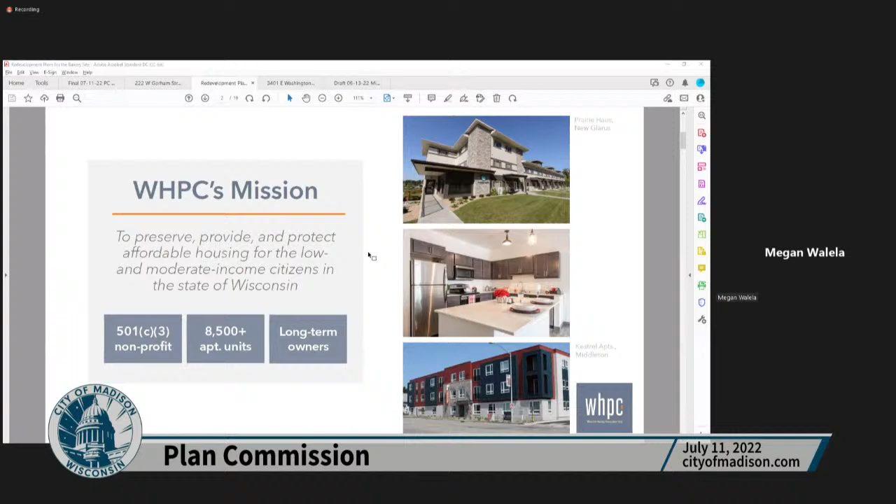Next slide, please. Here are photos of the site we plan to redevelop. You might remember the bread aromas that wafted from this site when it was an active bakery. But the 6.4 acre site has been sitting vacant for 3 years, even longer for the adjacent retail building along this major transportation corridor, which is unfortunate since this intersection will soon have a bus rapid transit stop, which I'll show a map of in a moment.

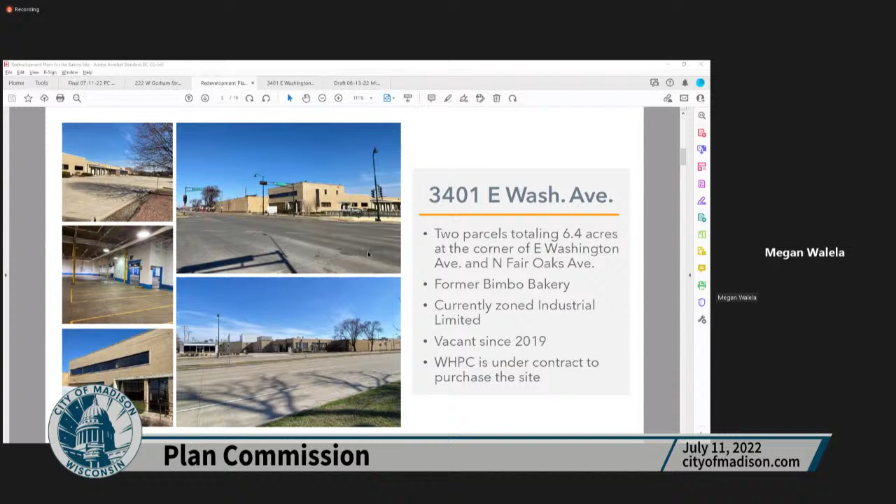Next slide, please. This project will bring 245 affordable apartments to Hawthorne neighborhood, 100 one-bedroom apartment homes, 102 two-bedrooms, and 43 three-bedrooms, including 12 townhomes. The site plan you're looking at shows the 4 buildings we're planning, which Kevin Burow of Knothe and Bruce Architects will show you more of in a moment.

This is a mixed-use development with approximately 4,400 square feet of commercial space along East Washington Avenue. And we're pleased to be able to offer 1.5 acres of park space, fitness and community rooms for residents, and soundproofing given its proximity to the airport, as Tim mentioned, and traffic along East Washington.

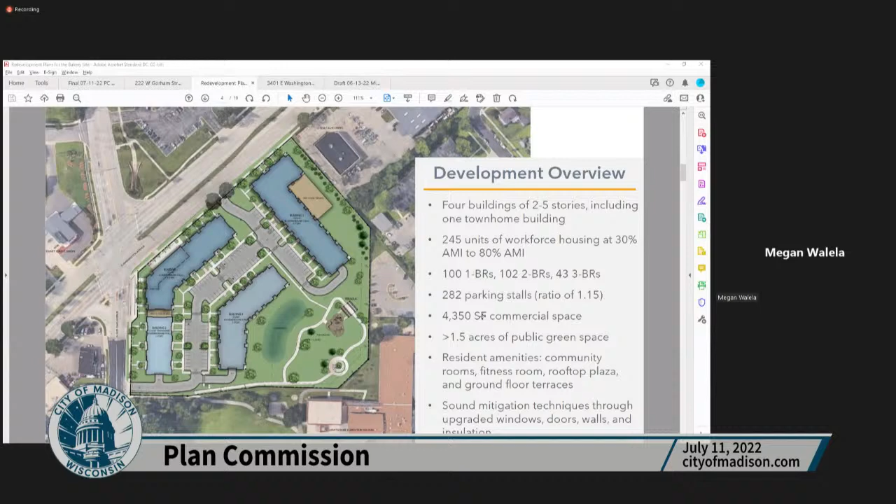Next slide, please. The site is close to many amenities such as Access Community Health Center, East Madison Community Center, and Madison College north of the site, and Hy-Vee Grocery less than a mile to the east of the site.

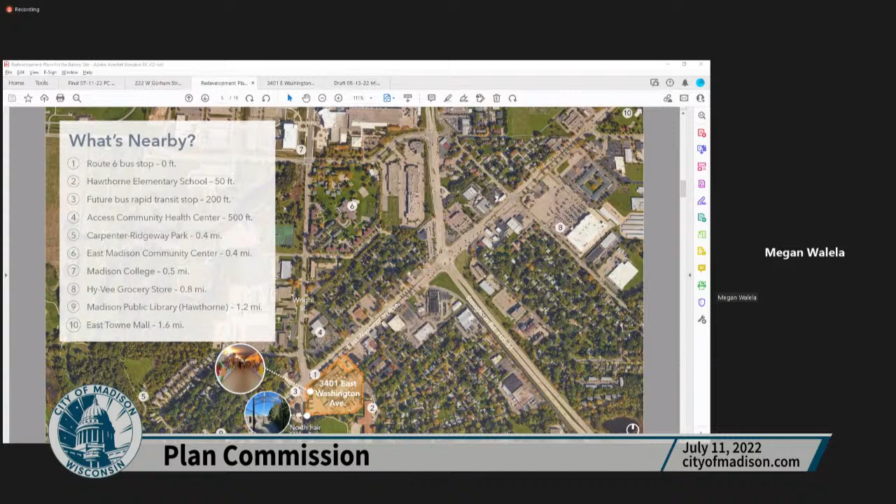Next slide, please. The location of this site along the Bus Rapid Transit's Red Line will help promote the city's sustainability goals and be a great feature for residents without cars or who want to reduce their carbon dependency.

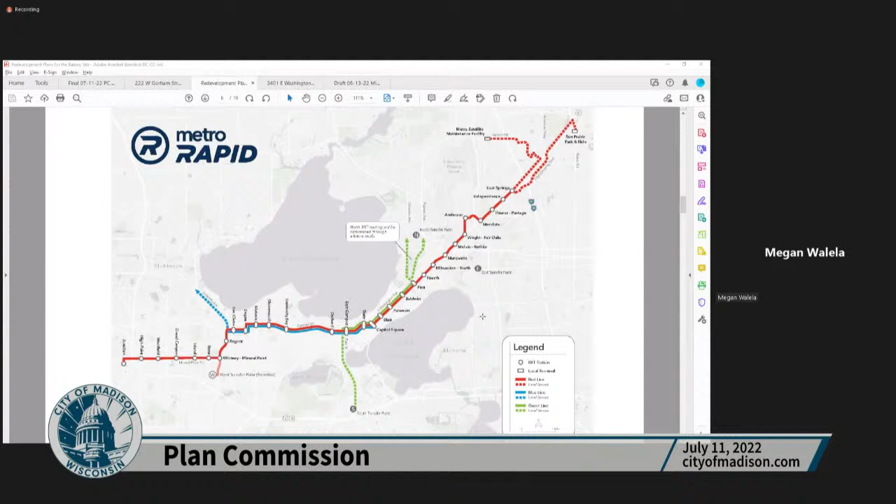Next slide, please. That orange dash shape is the outline of the site. So you can see residents of this development would be able to cross the street to board the Bus Rapid Transit at the Wright Fair Oaks stop. Next slide, please.

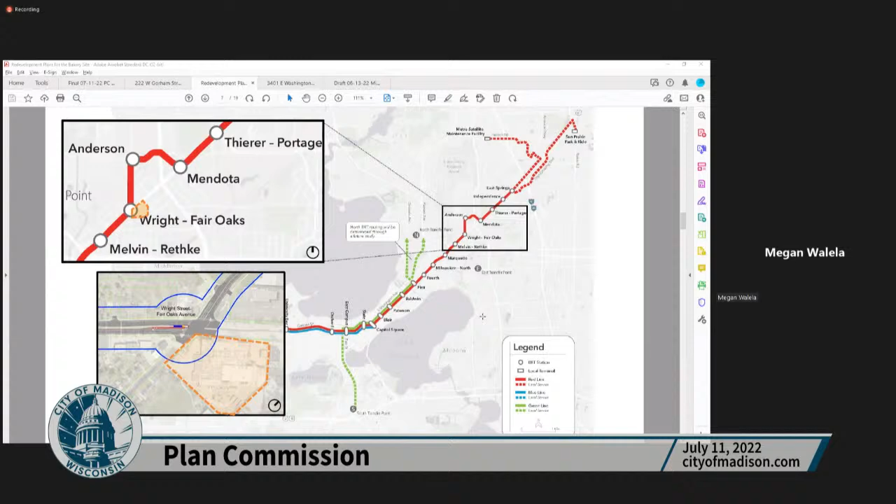As I wrap it up, I wanted to give you a brief summary of our outreach efforts today. I'd like to thank Alder Abbas for his continued engagement and support of this project since it entered his district this year, as well as Heather, Colin, and city staff for their efforts. In addition to meetings with a lot of businesses and organizations in the area, we've held several neighborhood meetings, including what I understand was the first hybrid in-person and Zoom neighborhood meeting in Madison, as well as coffee meetups with neighbors. These efforts have helped us arrive at the site plan and design that I'll now turn over to Kevin Burow to walk through.

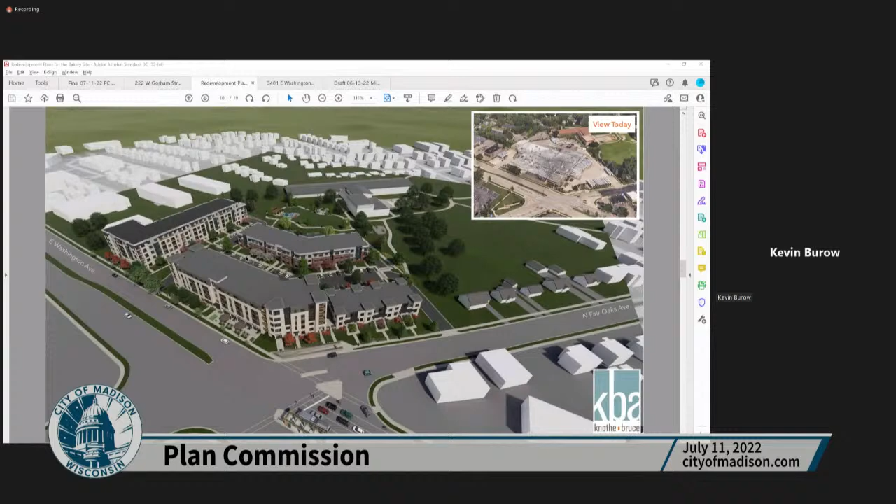If you go to the next slide, please. Here's a view looking from the corner of East Wash and Fair Oaks, where you can see how we're engaging the corner with a 5-story building, which would be the mixed-use building, which has commercial space right on the first floor, highlighted by the signage and the outdoor gathering areas. And then in the foreground, you can see the access to the underpass underneath East Washington Avenue for residents to be able to walk across and safely get to Madison College to the north.

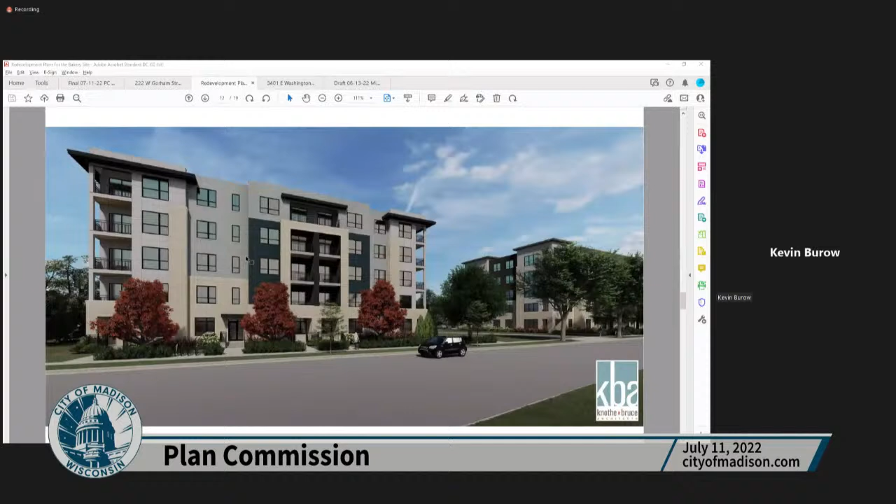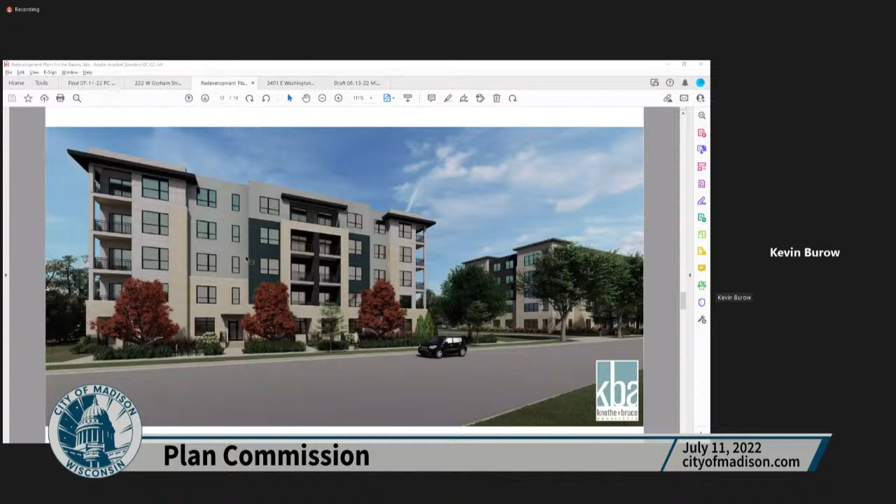If you go to the next slide, please. Here's a view then further down East Washington Avenue. You can see the second 5-story building, and this would be a residential building, which would have access to all the outdoor amenity space. If you go to the next slide, please.

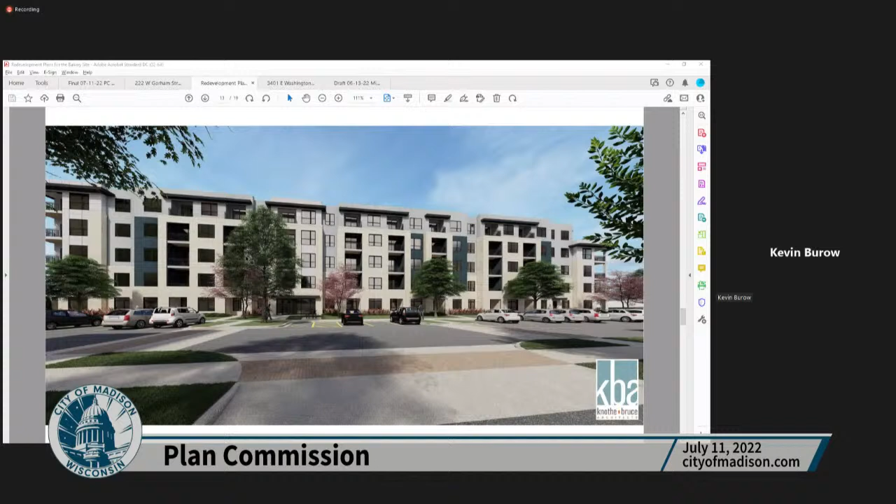Here's an interior courtyard view then of the project. You can see we have minimized the amount of parking on this property by utilizing just over 1.1 stalls per apartment and really enhancing and creating safe pedestrian crossings throughout the entire development.

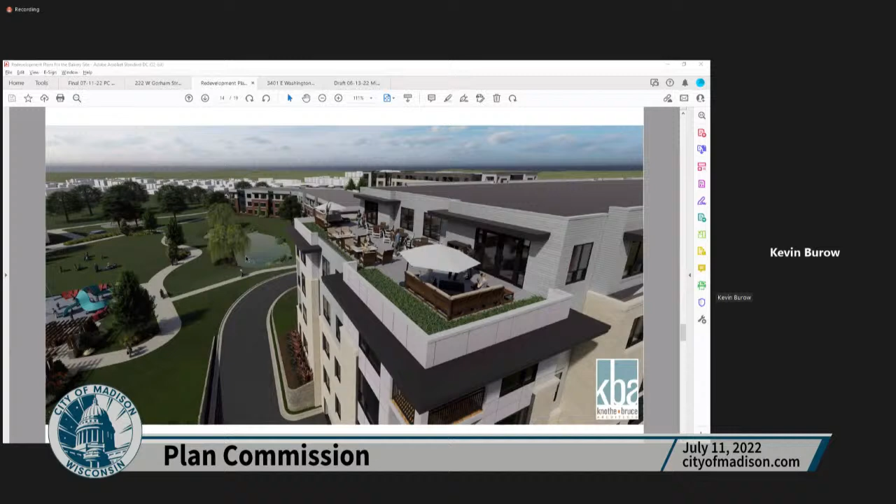Here's an interior view of that parkland area, where we'll have outdoor gathering spaces, playground areas, grilling stations, etc. So easy access for all residents, and it serves as a wonderful transition between this mixed-use development and Hawthorne Elementary School, which would be directly behind us.

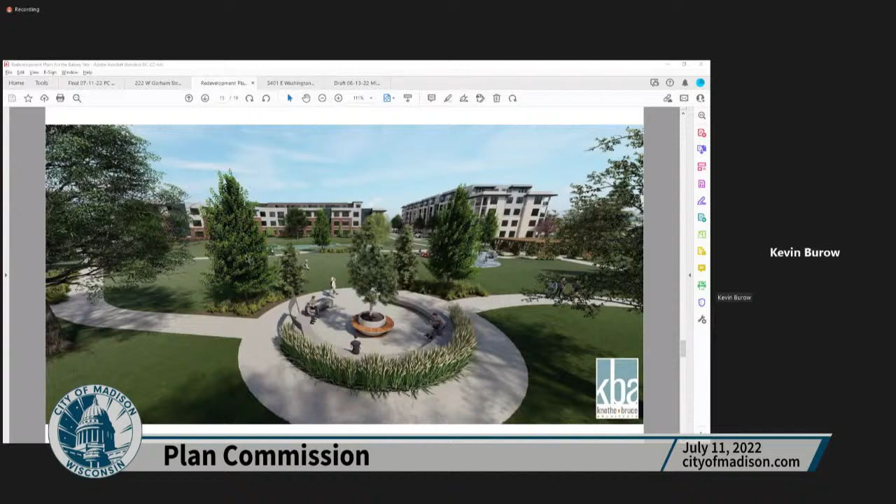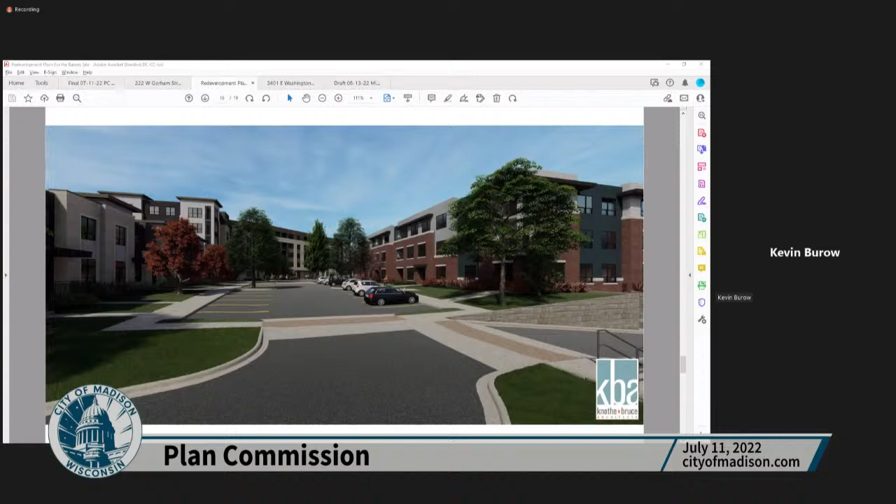Here's a view. We've created a strong pedestrian connection throughout the center of the property, connecting to that underpass along East Wash, which gives you easy access to the bus rapid transit station that will be occurring there.

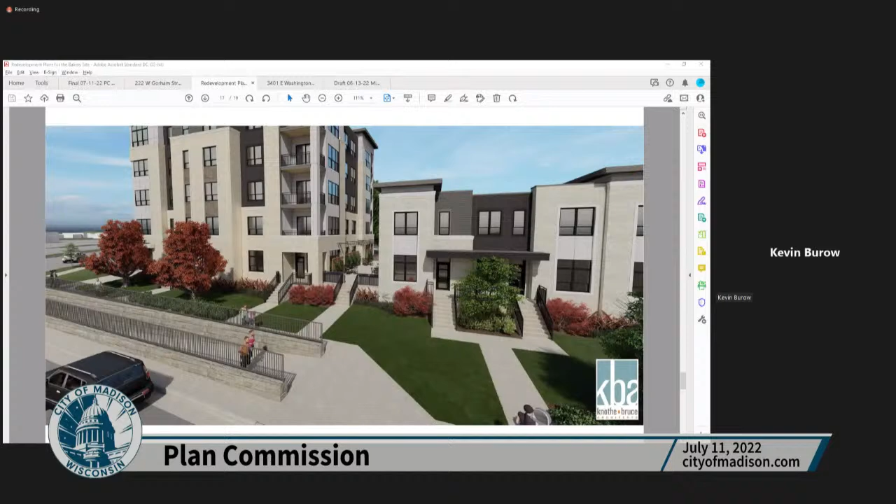And here's a view looking at that bus rapid transit station, which will be at the intersection of Fair Oaks and East Washington Avenue.

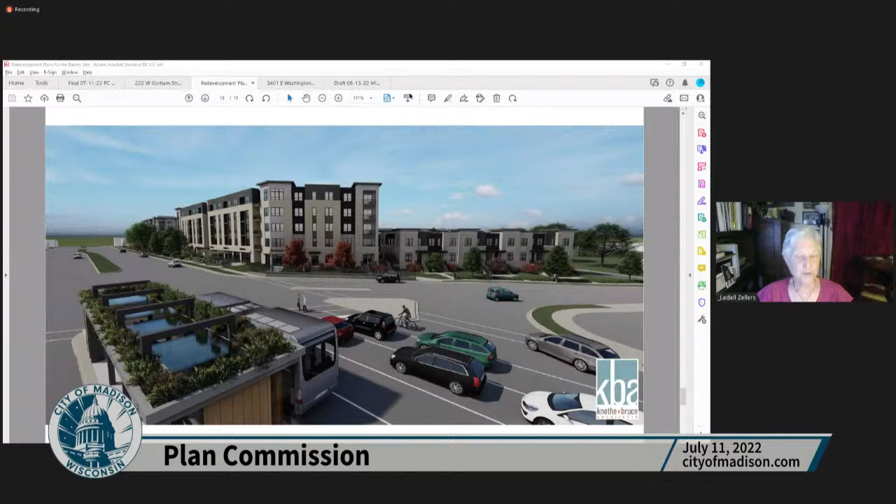I thank you for letting me speak. I live in the Eken Park neighborhood, I've been here about 30 years, mostly renting and lately become a homeowner. I was at a previous meeting the developers had for this, and I strongly support it. It seems very thoughtfully done. I like that they have green space, particularly between the buildings and the elementary school. I love that it's affordable housing, we definitely need more of that. Having it on East Washington is a great boon. The first speaker talked about a lot of the things that are close, like Madison College, great access to BRT, great access to all the bus lines, downtown entertainment, Hy-Vee, Aldi, which is a great grocery store for those of us who aren't very well off. Overall, I think it's going to be a really good project, and I think they've put a lot of work into it. I think it's going to be as good a boon for our neighborhood as Ella's Deli was, the redevelopment of that apartment building. So I would just like to ask for your support on this. I've been impressed with them so far.

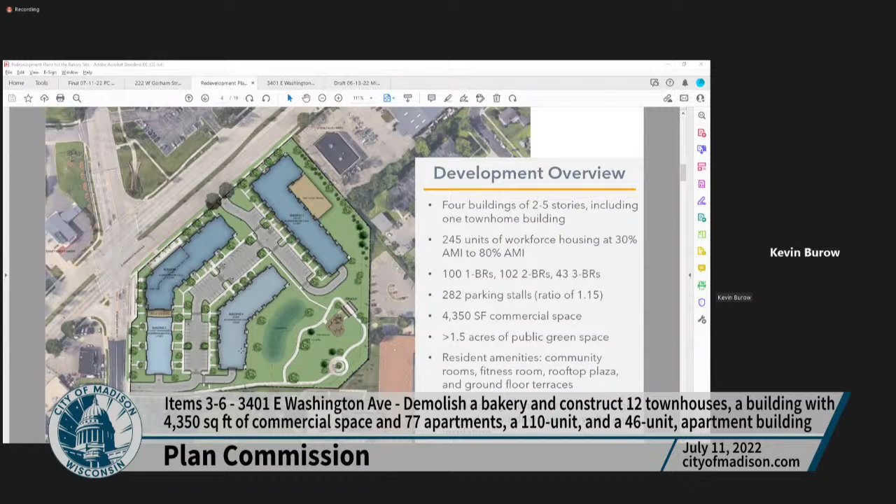Sure, I'd be happy to answer those questions. In regards to access to the site, we have 2 vehicular access points, but they are removed quite a bit from the intersection of East Wash and Fair Oaks. On the far southern end, there's a driveway running along the property of the school to the south, with residential immediately to our south and the school adjacent — that's the one vehicular entrance off of Fair Oaks. Towards the middle of our site along East Wash, we have the secondary vehicular entrance. So people can come either way: if heading northeast on East Wash, they can turn in, or if coming north off Fair Oaks. If coming from southwest on East Wash, they'd take the corner at the lights, head down Fair Oaks, then enter the property. So we're providing a safe distance from these driveway access points. All access to the buildings is contained within the interior of the property and along the sidewalk on East Wash for the commercial space and the main lobby entrance. All loading and unloading of residents and visitors takes place interior to the site, in a safe area, as there's no street parking available along East Wash or Fair Oaks.

With regards to any of the trash, that'll all be contained within the buildings in the basement levels. Each building will have their own interior trash room, accessed through the same entrance that residents who have access to the underground parking use. We locate the trash rooms immediately adjacent to those access points, so that there's central dumpsters available for residents to utilize, and then the trash companies would pick up safely from within the interior of the site.

As you can see on this plan, we have created numerous pedestrian crossings throughout the property and maintained the access pathway to Hawthorne Elementary School directly along the south end of our property, and then the interior sidewalk connections throughout the green parkland space that we are creating.

Just a quick follow. So in terms of loading and unloading, are there dedicated spaces for that, or is that just sort of, once again, you use what's available?

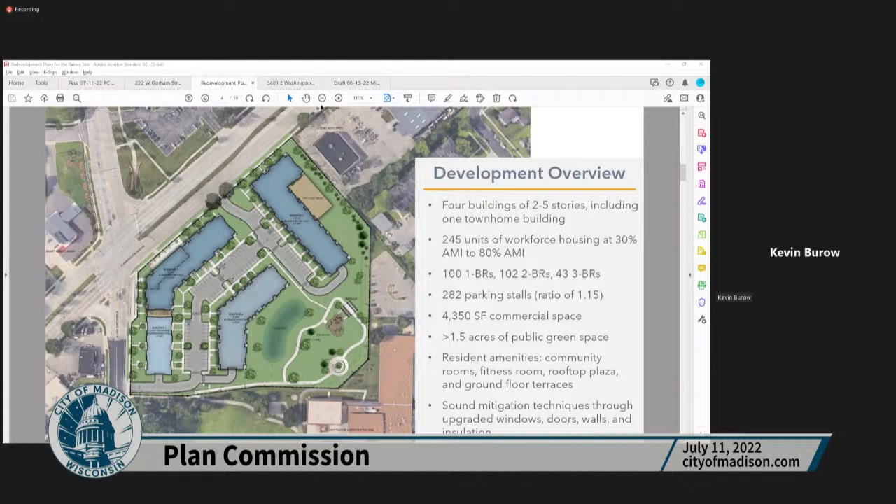Alder Paulson: Yeah, I have one more question. The zoning plan for that area says a maximum of 5 stories, and I see that you've gone to the maximum of 5 stories.

But because this is right on the bus rapid transit route, and we're interested as a city in looking at opportunities to put a little more density at these important intersections, I'm not saying that you should throw your plan away and start over, but I'm curious, if the plan had permitted you to go higher, would you have gone higher here? And I know that we're also in the flight path of the airport, and I'm not exactly sure where that height limit comes into play. But if you could have gone higher, would you have gone higher?

Kevin: I can speak to the construction techniques that will be used for this project to answer that, but Megan might want to chime in after I finish. The most efficient and cost-effective way for these buildings to be built in this market is a wood frame structure. Within a 5-story structure, we're able to achieve that by providing a concrete lid over the first floor and then 4 floors of wood framing above that. So this is the most cost-effective and efficient way to construct this.

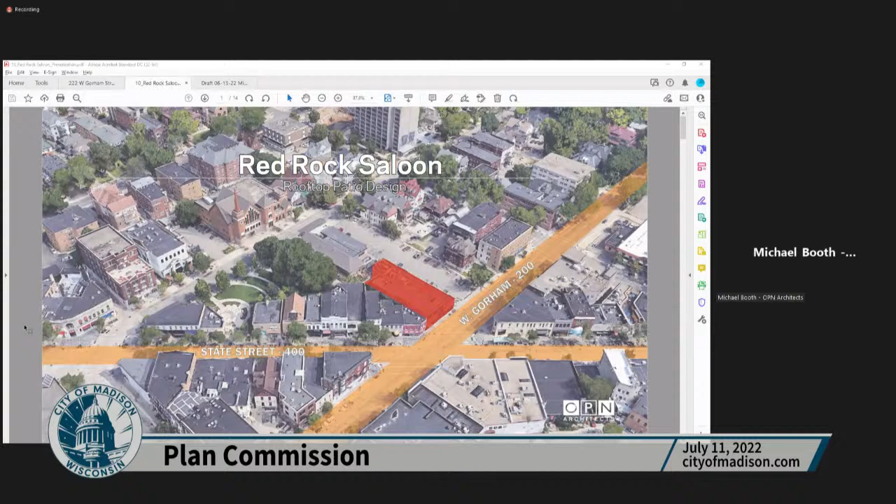Next slide, please. This is another closer bird's eye view of the patio design, a bit closer, at dusk. I chose to show it this way because it's easiest to see the modifications to the existing exterior that we're proposing, primarily on the northwest wall. You'll see 2 larger overhead doors in the closed position, flanked by 2 pedestrian doors.

Those are the proposed modifications to the existing exterior that would be cut into that wall. The patio itself is set back from the existing parapet about 10 feet. The goal there was to reduce the presence from the street, as well as provide an extra barrier with the guardrail between patrons and the parapet of the building, for an extra layer of safety. The primary space of the patio is open for seating, and then we have a shade structure with a masonry wall at the northwest end that covers the lounge style seating.

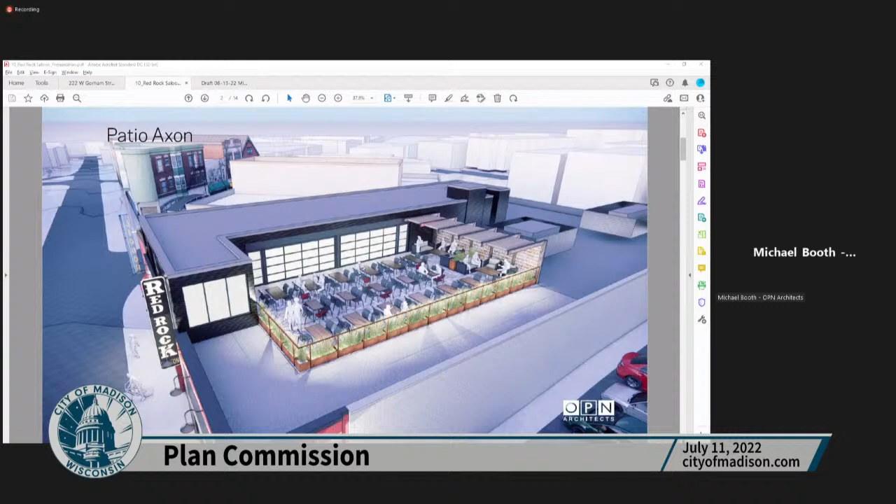Next slide, please. So this is just the same view during the day. Next slide, please.

As we move into the design in a little greater detail, this is a view of the lounge seating area where we have the masonry wall in the form of a gabion wall, a cage structure with a rock inlay. We chose that strong masonry wall because it's good to help with sound, and it also reflects the Red Rock brand. That wall is embedded with columns, with a wood and steel structure that cantilevers over the lounge seating area with a wood slatted shade structure to provide extra shade for that area.

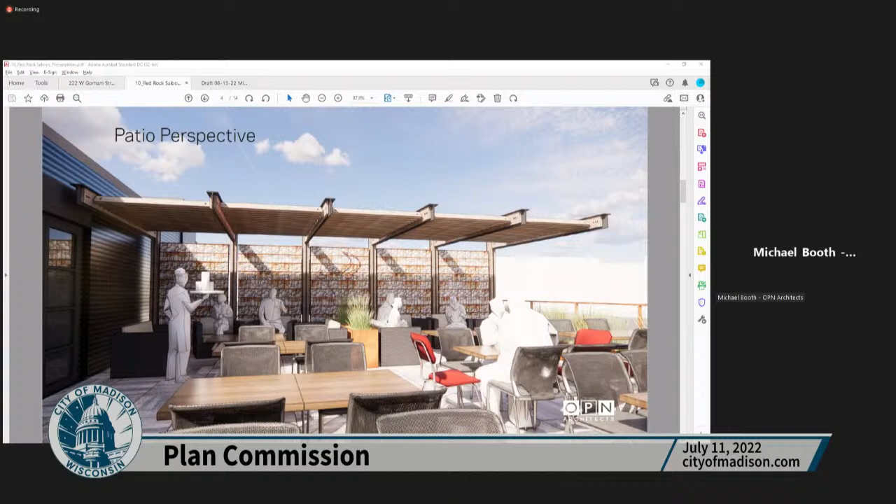Next slide, please. This is a view from the street perspective that shows the patio and shade structure would have minimal impact from the street. Next slide, please. It's just a close-up detail of the guardrail and the planting bed. Next slide, please.

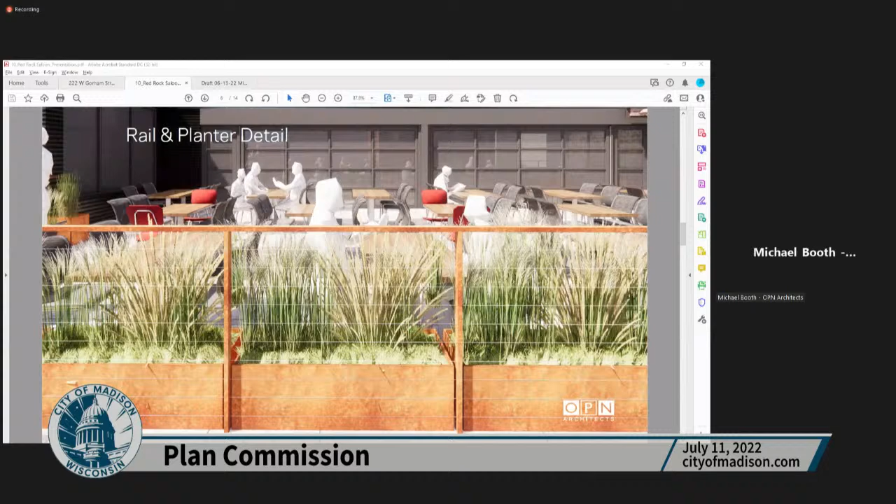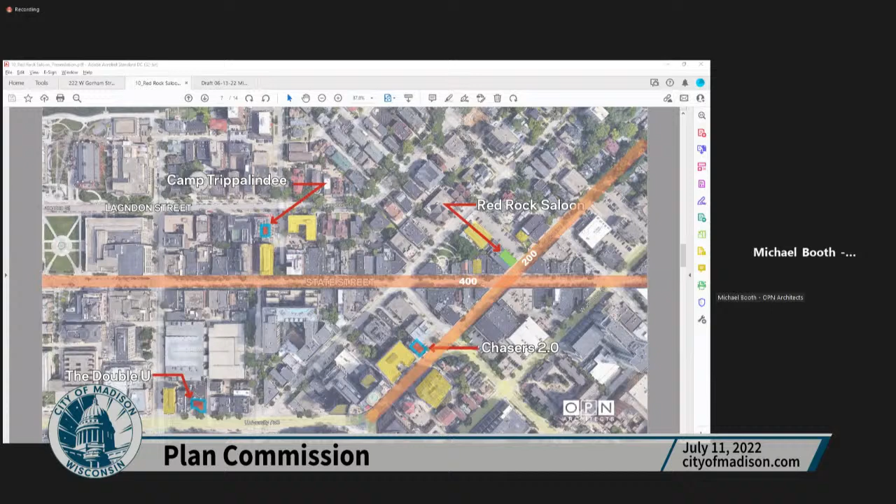This is a map of the local area at a higher scale that shows similar projects in the area. The red and blue boxes are similar patios, and the yellow is housing that is close by. Next slide, please. And that concludes our presentation, and we'll turn it over for any questions.